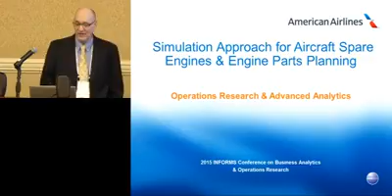I am Steve Oakley from American Airlines, and we're honored to be able to share today about our simulation approach for aircraft spare engines and engine parts planning. I'm going to go through some background about who we are and what we do, and then introduce the problem.

So today we're going to talk about spare engines and engine part spares, or what we call shop pool. And don't worry if you're not interested in engines; this type of work, both on our theory side and our application in the simulation, can be applied to any kind of repairable part. So it could be in the industry of construction or manufacturing or mining or transport services, not just the transportation

or airline industry. Okay, Jose will pick it up there and go through our approach and talk about case studies, application of what we've done and how it affects AA, and then we'll wrap up with conclusions, and then there will be time for questions and answers.

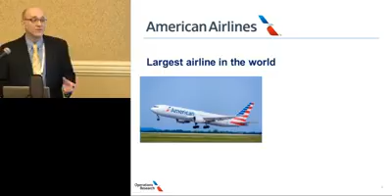Okay, we are American Airlines, and after our merger with US Airways in late 2013, we are now once again the largest airline in the world, as measured by revenue passenger miles. We have over 1,000 aircraft. We carry more than 500,000 bags a day for more than 300,000 passengers, and that takes a large employee base of about 100,000 people. Within that group, there's a much smaller group of focused operations research and advanced analytics professionals.

And we do internal consulting and decision support for major business units. So Tech Ops is maintenance and engineering, just another name for that. Revenue management, which would be overbooking, seat inventory control, and controlling the fares and such. Network planning, or the schedule and crewing and things like that, and many other business units. We can do consulting for any business unit in the airline.

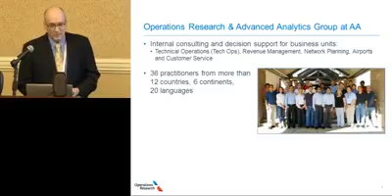Here's a picture of the group. We have 36 people from every inhabited continent in the world, speaking 20 languages, hailing from 12 countries, and having a multitude of advanced degrees in OR, patents, journal articles.

Okay, maintenance operations. Now, in an airline, one of the most expensive items is maintenance. The top three typically would be wages and salaries, jet fuel, and maintenance. So it's very important. It's critical to the operation in a couple of ways. We want to have reliable aircraft, and we want to use them efficiently. So we need to have maintenance to support that.

And American does a lot of its own work, so we have maintenance bases. Our biggest one is in Tulsa, Oklahoma, but we also do work in Charlotte from our merger, and in Dallas itself, where our headquarters is. At those bases, different types of work gets done. So engines like we're talking about today, landing gear, avionics, electronics, lots of things at the small scale, but also all the way up to a full aircraft overhaul. And that's when we basically tear a whole aircraft apart and rebuild it. Right? That's a huge operation.

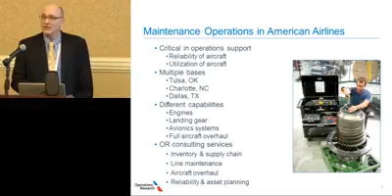On the OR side, we support inventory and supply chain, so anything having to do with parts, we were involved with that. Line maintenance, so that would be maintenance operations out at the airports, and aircraft overhaul, like I mentioned, and reliability and asset planning, and that's where the engines come in. Right? Engines are a major asset for the airline, and they're expensive. If you own your own engines, you have to make a major investment, and once you own the engines, you have to have that supporting inventory to deal with repairs.

Now, if we can use analytics and do good planning, then we can realize some significant savings. It's important to point out that in the airline business, analytics is accepted in areas like revenue management and scheduling or crewing. But in the maintenance world, analytics is not so accepted. And this work represents a major step forward for us in really getting a footprint of showing what analytics can do to the bottom line.

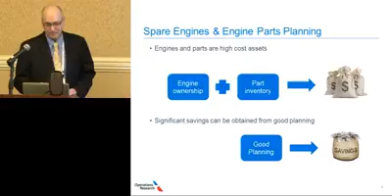Okay, spare engines are critical in two ways. One is operationally. So I mentioned a full aircraft overhaul. Engines also need to undergo these overhauls. So this is an operation that might take several weeks and cost in the single-digit millions of dollars. And while the engines are undergoing that process, we need to have spare engines to be able to cover it. So we've got to meet our flying schedule. We're going to have complete spare engines.

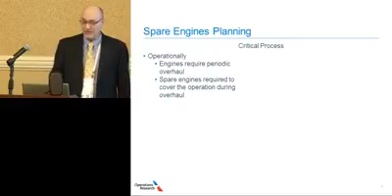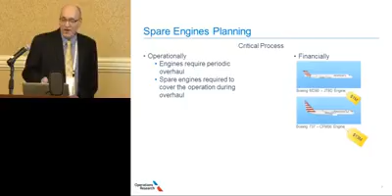On the financial side, let's look at some numbers. So for a mature fleet like our Super 80s, the market price might be about $1 million. For a newer fleet like our 737s, more like $13 million. And finally, for our wide bodies, it's a large aircraft and a large price tag, $35 million. That's for a single engine. Our 737 fleet alone, which is our largest sub-fleet, has about 250 planes and is still growing as we get new deliveries. The investment is $180 million in spare engines.

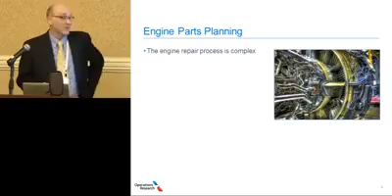Okay, let's move on to engine parts planning. You can see from the picture of the engine here, an engine is a complex piece of machinery. It's got over 800 parts in there, and it's difficult to deal with that at times when it undergoes a repair. There are lots of factors that introduce uncertainty and variability. Some of those might be scrapping.

A part comes off an engine, and maybe it's run out of time, maybe for some other reason it's not usable, we have to throw that out. We might borrow a part. If we don't have a part in inventory, we can look to an upline engine. Maybe we can borrow a good part from another engine and save ourselves the effort of buying one.

And finally, engine harvesting. That's more of a rare event, but we need to model it when we might be retiring a fleet. So we have an engine parked out in the desert somewhere, or a plane parked out there, and there are engines on it, and we can use those engines. So that can help us delay some of our maintenance costs.

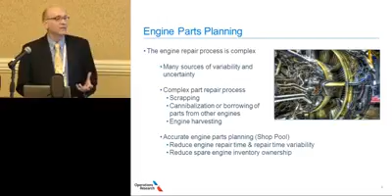We want to do accurate planning for our shop pool, or this inventory of parts, because it can help us reduce the amount of time it takes to repair an engine and the variability associated with that, and also reduce the number of whole spare engines that we need to keep. Now, I talked about some of the expenses of the engines themselves. The spare parts also cost a lot of money. We have in the neighborhood of $70 million of investment in our shop pool.

Okay, spare engines. This process is fairly straightforward, but let's take a look. When an airplane comes in, if the engine has to come off the wing, we take it out and we send it out for repair. So it would be sent to, say, Tulsa for the shop work. Now, ideally, we would have a spare available there. But let's say that it's not there for whatever reason. If it's not there, the aircraft can't fly, and we say it's out of service.

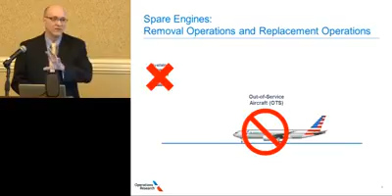So keep this in mind, because we're going to be talking about this later as a measure of how the system operates. It's unavailable to fly. We have to wait for a spare to come before we can do anything with it. That affects our revenue. And for the passengers, you can see the dreaded delay or cancel on the airport monitors. Nobody's happy, right? Let's look at another angle on that, all right?

Now, if we do have the spare, then we go through the same process, right? We take it off, we send it to the shop. But we have a spare up there, and it's important to note we want to have the right number of spares, right? If you need 2 spares somewhere and you have 4, that's a waste of our money. We don't really need to be investing that money there. We need to put those spares somewhere else. So financially, we do not want to overstock.

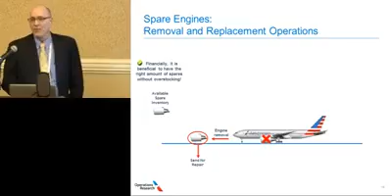Okay, so if we have the spare, we can replace that on the aircraft. Everything's good. Our bottom line should be okay. And instead of those delays, we should see more on-time flights, right? And we're all happy, customers and employees alike. Okay.

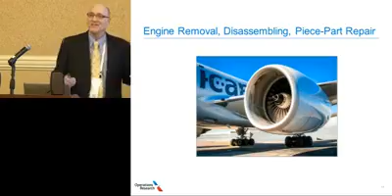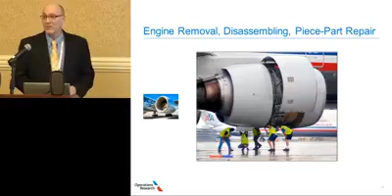Let's move on to the engine removal, disassembling, and piece part repair. Before we go into the details, we'll do a little pictorial view here. This is an on-wing engine up close. These things are massive pieces of machinery. We looked at how sophisticated they were with the picture of the inside. They're also big. If you look at a wide-body aircraft, you can see it dwarfs these 5 guys, right? And it takes special equipment just to be able to handle these. We have that equipment in Tulsa.

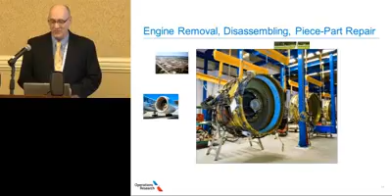And here's the engine itself in the shop. They come in and move through racks through the various stages of the repair process. There are a lot of other elements as well, parts that go in the engines—blades, vanes, different components—that we need to worry about as far as our inventory.

Engine repair programs are divided at American into two types: light repairs and heavy repairs. A light repair would be something similar to getting your oil changed—engines need routine type maintenance, and we can do that fairly quickly. We're not really going to focus on those today.

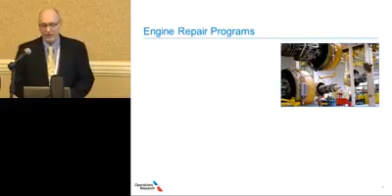We're going to look at the heavy repairs. I mentioned earlier that we can harvest engines—just keep that in the back of your mind, it's again a rare case. But on the heavy repairs, we're talking about an engine going through this weeks-long repair overhaul process. It's very expensive, but engines are durable. Today's modern engines can go years without having to do a heavy overhaul. So that's good, they can take a lot of wear and tear. You can go up to 15 years between major work.

Now, in that process, there are issues that we need to worry about. The shop has a capacity—there are only so many racks, and there are only so many skilled workers. The labor force is limited, so we need to worry about that. And I mentioned the scrapping and borrowing; we'll look into that in a little more detail.

How does the engine repair process work? Well, at the 32,000 foot level for our business, there's 6 basic steps. We introduce the engine into the shop—that's the arrival—and then we take it apart. Out of the 800 components in the engine, we might take out a majority of them, and then they're shipped out for what we call piece part repair, which we'll be focusing on today. Then at some point later, we want to reassemble the engine, put everything back together, test it, make sure everything's working properly, and then we can ship it out and put it in the right spot for a spare engine inventory. Okay, that's the broad view.

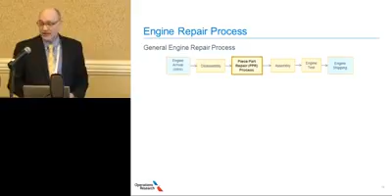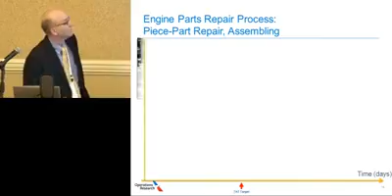So we have here some blades, and they might have various times of repair. In that process, we do lots of things—parts need to be inspected, parts might need to be cleaned, they might need to be lubricated, polished, buffed, or maybe some more severe work like milling and grinding. So there's a lot of variability here—you might have some short ones or some longer ones.

I mentioned earlier that we have some scrapping. Here, by these red X's, we denote scrap parts. Those we must replace—we have to purchase a new part, so we'll put through a purchase order and get some new parts to replace those scrapped ones. And that scrapping could happen early in the process, or it might happen later—you might start working a part and accidentally do something and have to scrap it.

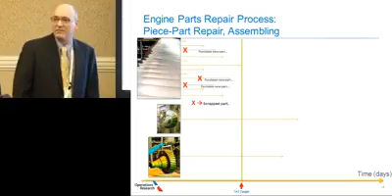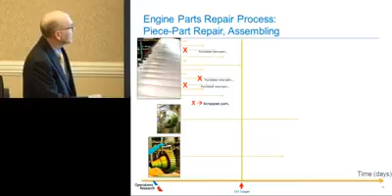So more variability. Okay, now check this out—we're at this turnaround time target, we want to start reassembling the engine, but there may be some parts that have not come back from the shop yet. We're not able to use that same part. That's what shop pool is for—shop pool is inventory that we can use and pull out from to put the engine back together.

Now, it may be that we don't have a part in the shop pool. If we run out, there's another option. We said we may be able to borrow a part. So if we go upstream a bit and find an engine that hasn't been introduced into the shop, then we can use a part from there.

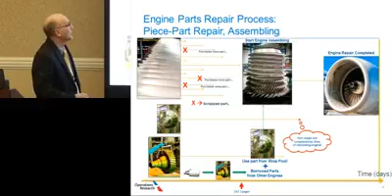Ideally, everything's ready to go. We use parts from the shop pool or from borrowing. We put the engine back together again, test it, and ship it out. Now, Jose's going to clarify exactly what we want to do from here, our objective, and how we went about doing that. Thank you, Steve.

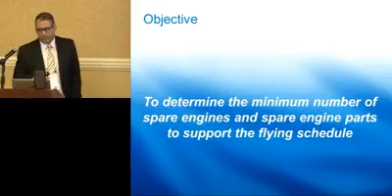Now let's focus on the objective of this project, which is basically, as indicated here, to determine the minimum number of spare engines and spare engine parts to support our flying schedule. All this, at the end, will be guided toward obtaining a tool for the end user to conduct easy calculations of that ownership.

But in order to achieve this objective, let's take a look at the approach we have taken in this project. Initially, we tried to obtain a closed-form development for that. As good engineers, as good scientists, we tried to obtain a very nice formula that could explain everything and capture and provide us that ownership calculation.

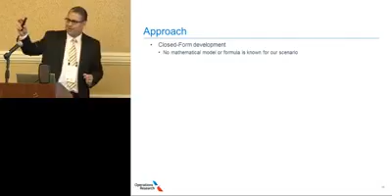However, this is a complex problem. It doesn't fit the classical inventory problem. It's a repairable inventory system where you have a closed loop, right? You have parts that are circulating. Some parts that are part of the ownership are sometimes in service on the aircraft, sometimes available in inventory, or sometimes in repair. So it's a much more complex problem.

In addition to that, you have multiple sources of variability: variability in the demand, variability in the repair times, different repair probability for the parts, for example. So that's something that increases the complexity.

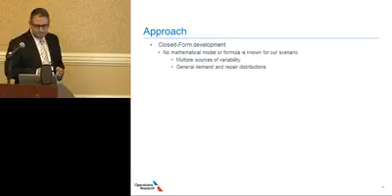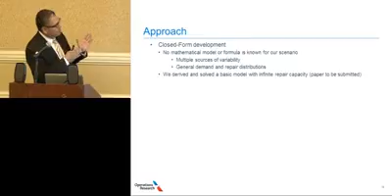We were also facing the possibility of having more general demand distributions for the problem, so we wanted an approach able to model that situation as well. But the mathematical and analytical approach has limitations. We were able to obtain some basic formulations assuming very specific conditions, for example infinite capacity, under very specific distributions for demand and repair time.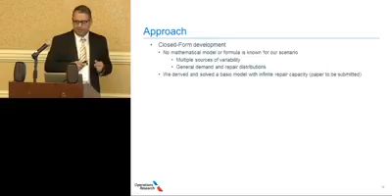And that's a paper that is coming that could be submitted soon. But we have limitations we're not able to address in a mathematical formulation. That led us to use a simulation approach to address the problem.

By using a simulation approach, we were able to model all those processes that Steve just described in the different animations we have, each in a logical, sequential way that models in detail the process and the complexity that we have. So we have that flexibility right there.

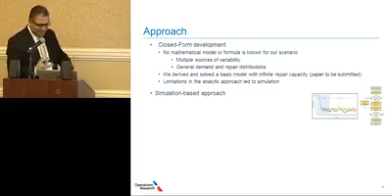From there, we were able to obtain simulation realizations of how that spare level changes over time, and from there estimate what the ownership should be to obtain a certain performance in our system. Flexibility to model those complex details of our process, such as borrowing of parts, scrapping, capacity constraints, and harvesting processes, was one of the appealing features of that approach.

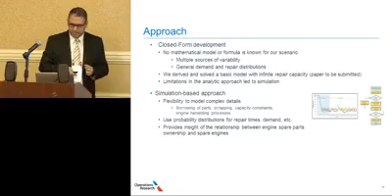Therefore, we can use a wide variety of distributions for modeling and capture the variability of our process. That's an important aspect of simulation. It also provides a possibility to understand the interrelationship between the repair of the parts in the shops and how that affects the spare engine ownership, which is very important for planning and for decision support in our operation.

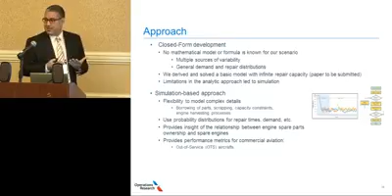In addition, the model also provides a possibility to express performance in a different way, one more natural for our operation — out-of-service events. So we can generate from our model the expected number of events in a given time period, and the expected duration of those events. That's very, very useful for our field operations.

Also, simulation provides us the possibility to run what-if analysis. We can conduct different simulations with different scenarios. Therefore, that opens a whole spectrum of possibilities for planning and for designing strategies.

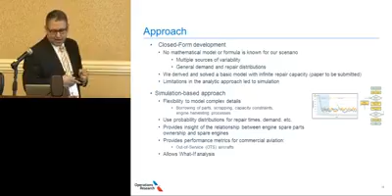With this simulation approach, we obtain two models: one at the higher level, which is the spare engine model, and one at the lower level, which simulates or models the repair of the spare engine parts, which is the shop pool model. Let's take a closer look at each of these models, starting with the engine spare model.

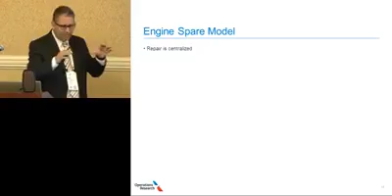In the engine spare model, we assume first that the repair is centralized. So we have a repair base where all the spare engines arrive for repair under different programs. Our available inventory can be in two ways: it can be either centralized in one location, or can be distributed. So we can model both cases.

One or the other can be useful depending on the type of engine. For example, there are some engines that are more reliable. We can properly reroute those aircraft in order to send them to a specific location. So in that case, the centralized approach is more appropriate.

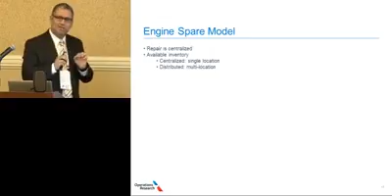But in other cases, we have other aircraft or other types of engines for which the repair and the removal of the engine has to be conducted on the spot. So in that case, the distributed approach is more appropriate, and a multi-location case is conducted.

From the different processes that we have illustrated in the previous simulation, we can obtain a flow diagram, a flow of the process, and this is the roadmap for our simulation. So based on that, modeling the engine removal, the replacement, the harvesting process, the repair time, and the capacity that we can face in the process, we have the roadmap for our simulation.

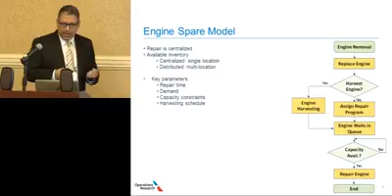Some key parameters that we consider in this simulation modeling are repair time and demand. Demand is obtained from other sophisticated forecasting models, where we can obtain the expected volume of repairs in a given period of time. We can also have capacity constraints, such as how many heavy repairs we can have in the shops, for example, as well as specifications about the harvesting schedule, if necessary.

In addition to that, this model can, as I mentioned before, be extended to a multi-location setting, where you have multiple stations from which you can receive the removals, then being transported to the repair base. Then after the repair, those engines are coming back to those stations.

For that, we also include in the multi-location case the possibility of modeling dispatching rules, from which we can select, based on different types of priority, which station is going to receive the next spare that is being completed at the repair. As usual, simulation in our case is run with multiple replications.

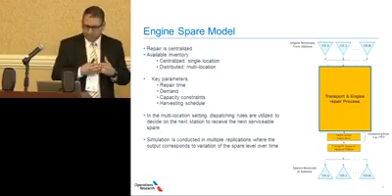Thousands of simulation samples are used in order to generate the variation of the spare level in time, from which we obtain an estimation of the ownership.

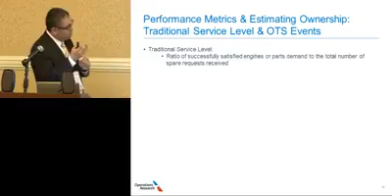In terms of performance, we use two points of view. We have the traditional service level point of view, which is obtained as a ratio of the demand that was successfully satisfied to the total number of requests. That gives us a kind of probability of availability of a spare engine or a spare part when it's needed.

In addition to that, this can be used as an input for our model, in that the user can indicate that they want to know, for example, what ownership they need to have for a 95% service level. So that can serve as an input.

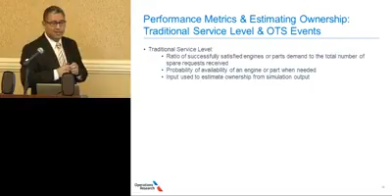In the other way, we can also use our model to set a specific allocation of inventory and then project what the service level will be under that allocation. So it's useful in that sense as well.

From the simulation output point of view, what we have is basically different realizations of the spare level, for example, in this case, the engine spares. We have a transitory phase of the process, a warm-up period, and also a steady state, which is the part of the process or time that we want to focus on.

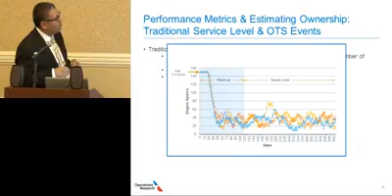From the point of view of calculating the ownership, we use a simple but elegant approach. We start our simulation with a high initial ownership, such that in the steady state, those realizations never reach the zero point.

Then, in the steady state, we provide a calculation of the percentile of those realizations. For example, a 10th percentile will give us an estimation of the 90% service level. So it's a simple approach that allows us to obtain those ownership requirements at a given service level.

The other point of view here is out-of-service events. When you have an aircraft that is out of service, we want to measure from our model the amount of events we can have in a given period of time. For example, in a year, how many expected events will you see, and what is the expected duration of those events? That's very useful information for field operations, and it's information the user can relate to more than the regular point of view of service level.

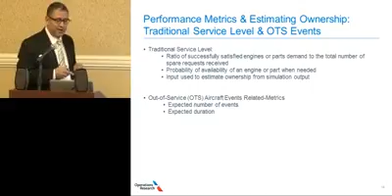Now let's talk about that lower level of modeling, the shop pool, where we are again modeling those different steps Steve mentioned, all the way from the arrival, the decision to repair or not a given component. Do we have to scrap that component, or conduct purchasing of a new part? Or can we borrow that part from an upstream engine being introduced? At the end of those processes, we always add those parts to the shop pool. But when it's time to rebuild the engine, we have to wait some time and take those parts from the shop pool. So that's the variation of going down or up in the shop pool. It's a closed loop system.

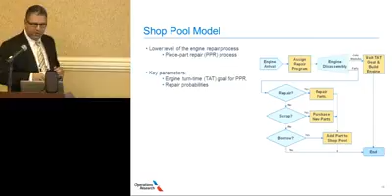Key parameters to mention here are the time we have to wait from induction until starting the rebuilding of the engine, which is very important. Repair probabilities, based on history of repairs we have. Scrap rates, capacity constraints. As in the case of spare engines, the output of our model corresponds to the variation of that spare level in time, from which we can obtain the ownership requirements.

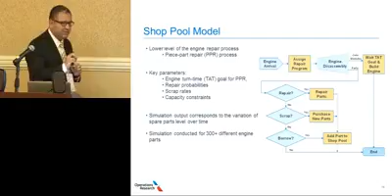Also very important here, as Steve mentioned, engines are built with hundreds of parts. In our case, for the shop pool model, we run this simulation model for each of those individual parts. So each individual part has a parameterization of the repair times, repair probabilities, scrap rates, etc.

In terms of how we implemented this solution for the end user, let's talk about the calculation tools we've implemented. This calculation tool has two sides: a user side and an external server side. On the user side, there's a graphical user interface implemented in Microsoft Excel Visual Basic, and also a component which is the simulation model. We have an executable independent program in Java that executes the simulation for the shop pool. That was a very important approach because the end user doesn't have licenses for third-party software like Arena or Simio. So we had to give them a final solution that's easy to use and also very fast to run, for example, a case of 300 plus parts in the shop pool. That was a very good option and a very good development.

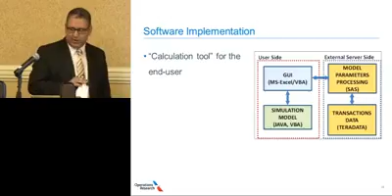On the external side, we have the server side of the implementation process, where we have the transactions data. We have an important data warehouse here, Teradata type, from which we can obtain all the history of the repairs, and from which, conducting the proper processing of that information using a SAS program, we can send back to the user interface all the parameters required to run our simulation.

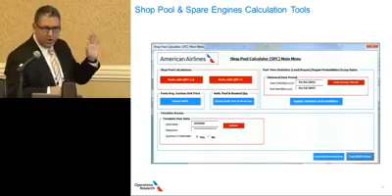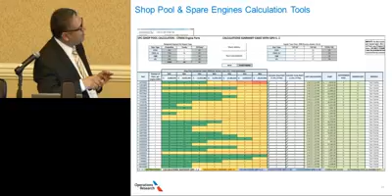Here I have some views of the tools we have implemented. This is one of the menus for the shop pool calculator, where the user can set up some important parameters, for example, which period of history they want to use to extract those parameters. We have other views of the tools here, for example, the main window for the different components being computed in terms of shop pool requirements. These are parts of engines, and you have different service levels, so our tool can compute those requirements for ownership.

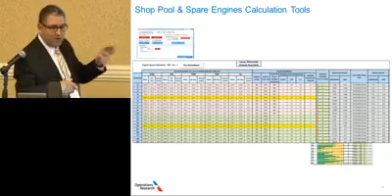We have also the case of the spare engine calculator that works more as a what-if type of tool, where you can have multiple scenarios. Each row corresponds to a different scenario where you can parameterize with different values for that repair time, for different repair programs. You can set up different constraints in capacity, different service levels, so you can have different what-if scenarios to compare. In general, we have implemented these tools for 4 different types of engines, as indicated here.

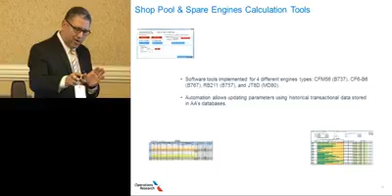And an important component has been the automation. We have had the possibility to link the data warehouse, process that information, and send back that information in the form of parameters. That helps the end user a lot in terms of running these calculations.

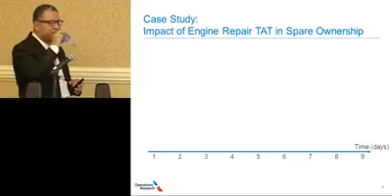Let's now take a look at several case studies in which we have utilized our tools. Let me take a couple before I get myself out of service.

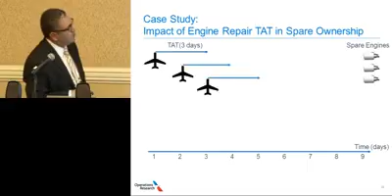So in the first case study, we're going to evaluate what is the impact of reducing the turnaround time in the repair in terms of spare engine ownership, and also what is the impact later in terms of shop pool. Let's start first with a little animation about what happens with the spare ownership in terms of engines. Let's assume first that the repair of our engines takes 3 days in this case. So any time that an aircraft arrives, you will need 1 spare available in your inventory. So these 3 aircraft will require 3 engines in your spare inventory here.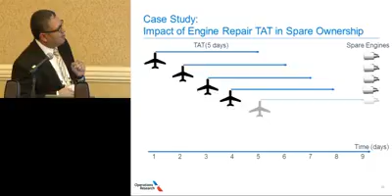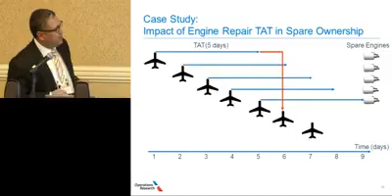By the fourth aircraft that arrives, assuming that everything goes fine, we can reuse the engine that has been repaired from the first removal. And subsequently, we can do the same with the others. So at the end, you only need 3 spares in that case. But now assume that you have a longer time. You have 5 days now. So in that case, you will have to increase your inventory of spares in order to cover the operation. It's not until the sixth aircraft, the sixth removal, when you can start reusing the previous removal that had been repaired, and then continue with the rest of the operation. So slow repairs demand a larger inventory of spares.

That's exactly what happened with one of the business units, a production control unit in Tulsa. They came to us and asked, what is the impact if we have to reduce our turnaround time? This is the output from our model, in which we obtain the spare ownership, shown here in the blue bars, for different turnaround times. In the red line, we have the current ownership, and these are calculations at the 99% service level. At the time of this analysis, the operation was conducting the repair in around 84 days for each of the engines. The first thing the model detected is that for a 99% service level at the current level of ownership, we were not able to keep that performance.

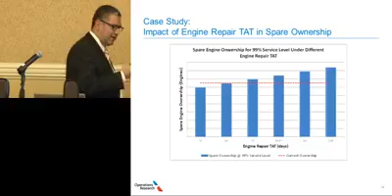So the question was, in order to keep that same level of spares, without buying a new spare, we have to reduce about 20 days, from 84 to 64. So we can keep the same current ownership, and therefore we need to reduce our engine repair time. But that has an impact in a different part of the process, which is the repair process, the shop pool. Let's take a look at what happens there with a little animation.

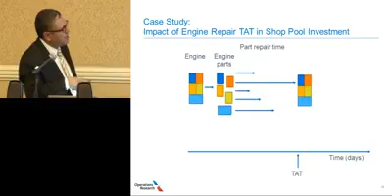Our engines arrive, and different components are disassembled for repair. Each component can have a different time for repair, right? So assuming that all the parts are repaired around this point, the TAT, or turnaround time, then we can reassemble all the components and build the engine, and everything will be fine. But what happens if we want to reduce that turnaround time? Some of the parts won't be completed by that time. For example, this red block here.

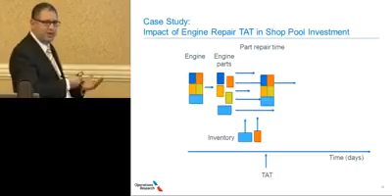So we need some inventory in order to cover that, reduce our goal for the engine repair time, and continue. But if we want to reduce even more, we're going to require additional inventory. So the impact of reducing the turnaround time is basically an increase in inventory, which is reflected in an increased investment in the shop pool. That is exactly what we have in this chart.

Going from the 84 days of the performance in our operation to the 64, therefore, represents an increase in the investment that we require for those shop pool parts. Of course, there is a trade-off. You can decide buying a spare in order to have a higher service level, or buy more parts. In these particular cases, the best decision was to buy more parts and improve other parts of the process in order to reduce that turnaround time.

So that case is very interesting because it gives us the interrelationship between spares and also the impact in the shop pool in cases when you need to reduce the turnaround time. The second case is related to how we manage the spare engines in the field, in different stations. Now, in this case, we assume that we have a distributed inventory in which we can have the possibility of borrowing spares between those stations. And we want to see what is the impact of reducing the duration of our out-of-service events.

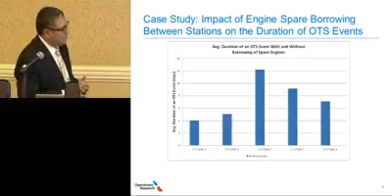When we allow, instead of waiting for that spare to arrive to the repair base, we can look to the opportunity of having one available spare from another station and move it quickly to the station requiring that spare, and then mitigate in a big way the impact of the out-of-service aircraft. For example, the case of Station 2, which represents one of our major hubs. And you can see that the impact of the OTS is different in different stations because of situations of distance or demand, for example.

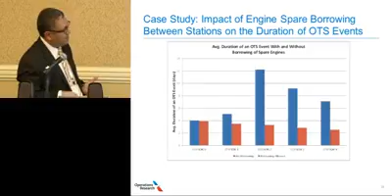So in this case, in Station 2, which was the one resulting with more impact with no borrowing, we're able to reduce in an important manner the impact of those out-of-service events. So that's important in order to define strategies, define rates, and how we can properly borrow those spares in the system.

To complete our presentation, let's talk about the impact that this has had in our company. First, we have a better planning of our spare ownership. It has been a big achievement to include these analytical tools in the TechOps organization, which is not the most analytical organization in our company, so that's very important.

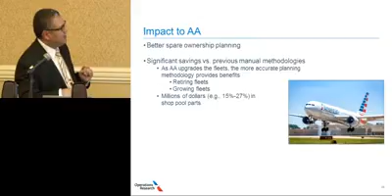Compared to previous methodologies, which were more manual, we have obtained important savings in inventory. We also have the possibility now to better adjust our inventory as we retire fleets and increase other fleets in the system. Savings can be in the range of millions, 7 million, for example, for one of the fleets or types of engines, between 15 and 27% in shop pool parts. And our application is currently patent pending.

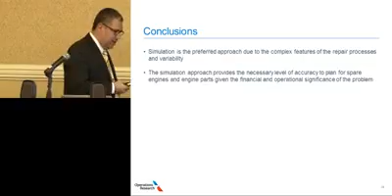Just to conclude, simulation is the preferred approach because of the complexity that we have found in this process, and we want to represent and capture the variability of the process. This also provides us the necessary accuracy to model the calculation of this ownership in a more accurate way. And it also provides us an important way to relate the shop pool with the spare engine ownership, which is very important. Also the possibility to measure the performance in a more natural way in terms of out-of-service aircraft, which is very important for field operations.

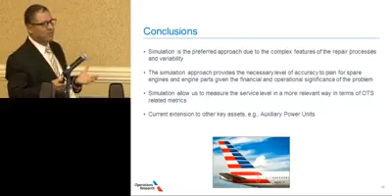In addition to that, that opened the door to apply this model to many other types of key assets in the company that also have a repairable inventory system, like auxiliary power units.